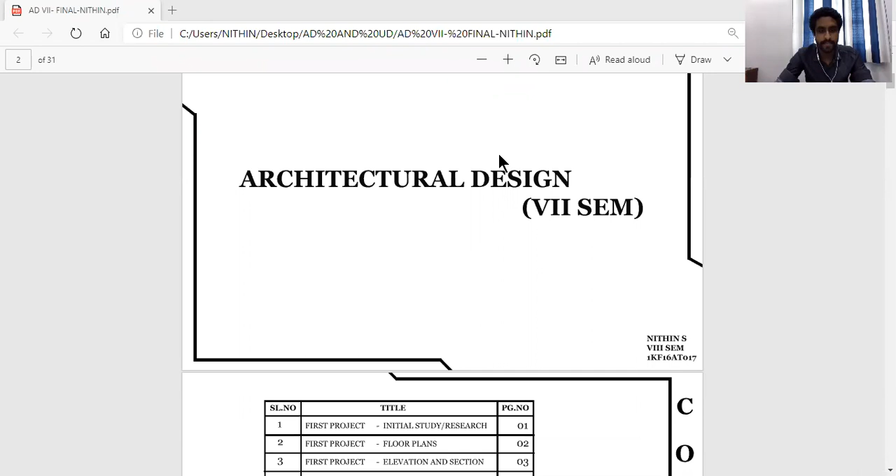So first we'll look into the minor project. The task here was to document an old existing structure and suggest a revitalization of that structure into a space useful for the neighborhood people.

So the structure I chose is in Talagatpura, along the Kanakapura main road. It's a 60-year-old building which was used as a leather making factory in those days, where they used to manufacture leather and supply it to states such as Kerala and Tamil Nadu.

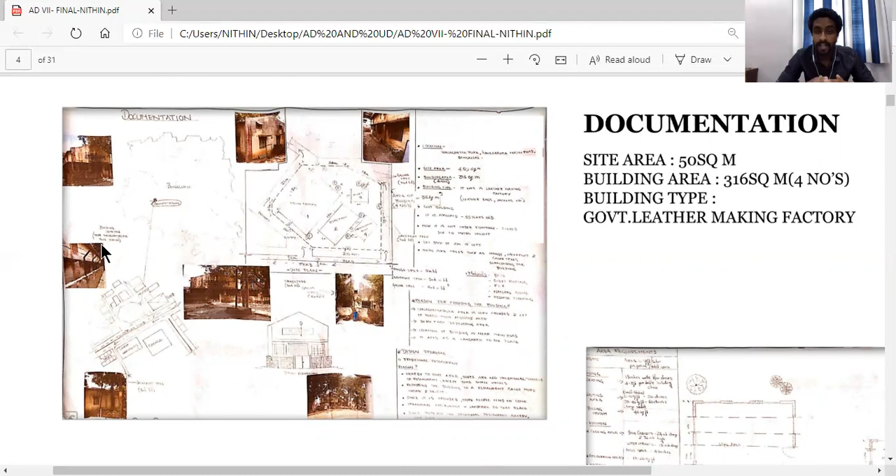What I initially thought was to revitalize that structure into a leather factory outlet itself, so that the old function remains the same and it gives more value to the structure as well as the surrounding space.

This sheet showcases the plans and elevations of the existing structure, where the plan is a simple rectangular plan with a manufacturing unit as well as a small office space. The small rectangular plan towards the right acts as a storage space where they used to manufacture and store leather items.

These two images showcase the elevation.

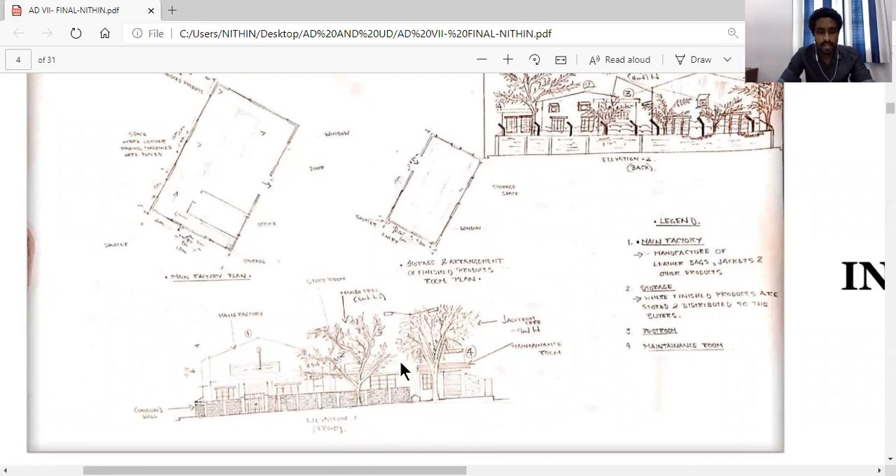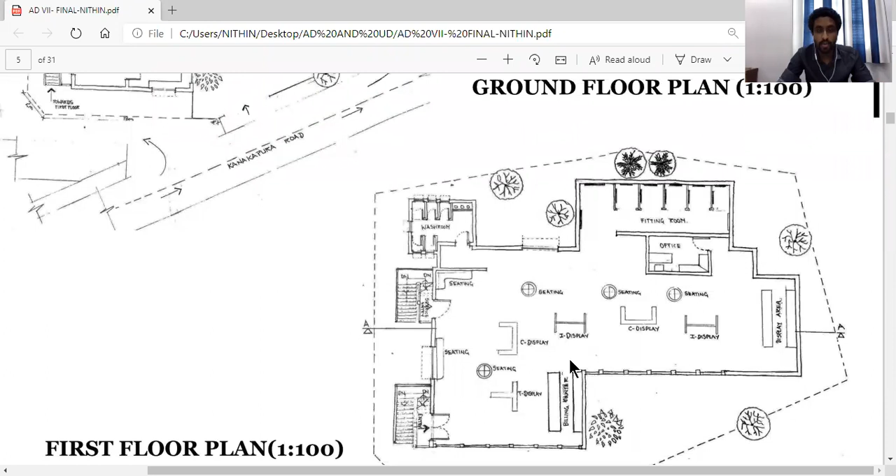Moving on to the proposed plan, it's a G+1 structure. The first plan is a ground floor plan acting as a manufacturing unit for making leather. The second plan acts as an outlet where they used to sell the manufactured leather. So basically it's proposed as a manufacturing unit as well as an outlet in a single building.

So this is about the plan. Moving on to the next sheet, this showcases elevations and sections, with a few details shown here.

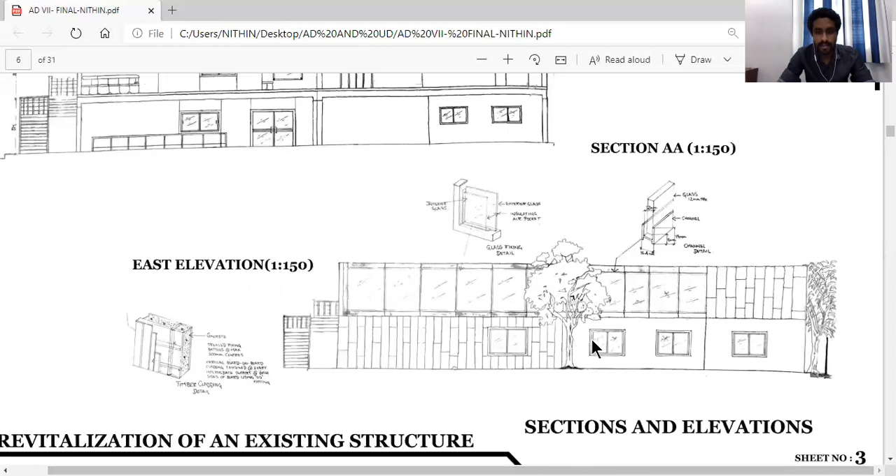These details are of the materials used for the exterior. The ground floor contains timber cladding. Why timber cladding? Because it's versatile, a natural and durable material, environmentally friendly, sustainable, and economical.

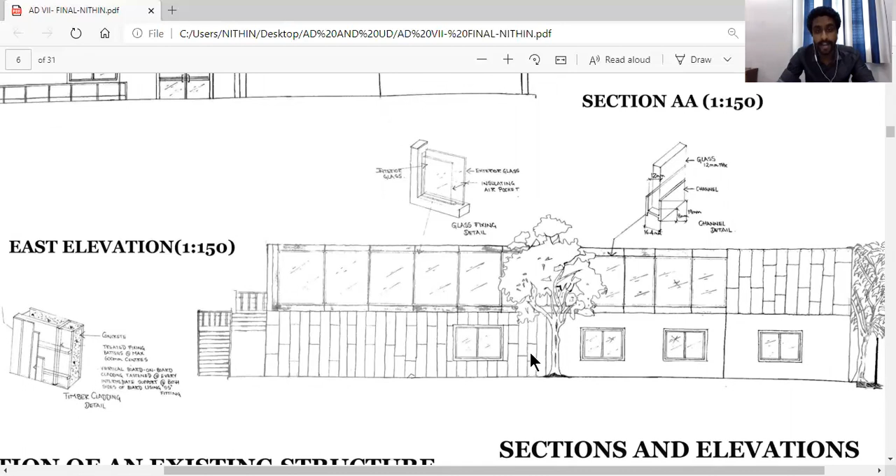The first floor contains a glass panel, and these details here are the fixing details of the glass and the channel detail.

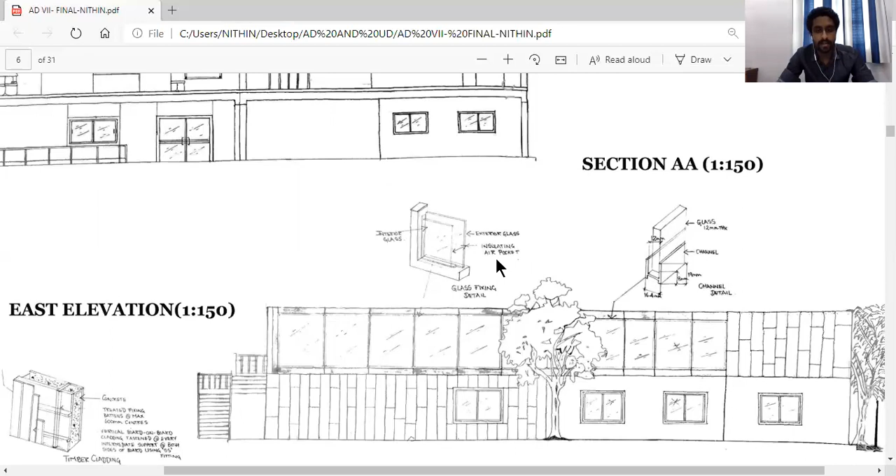So this is about the minor project. Moving on to the major project, which is the court complex.

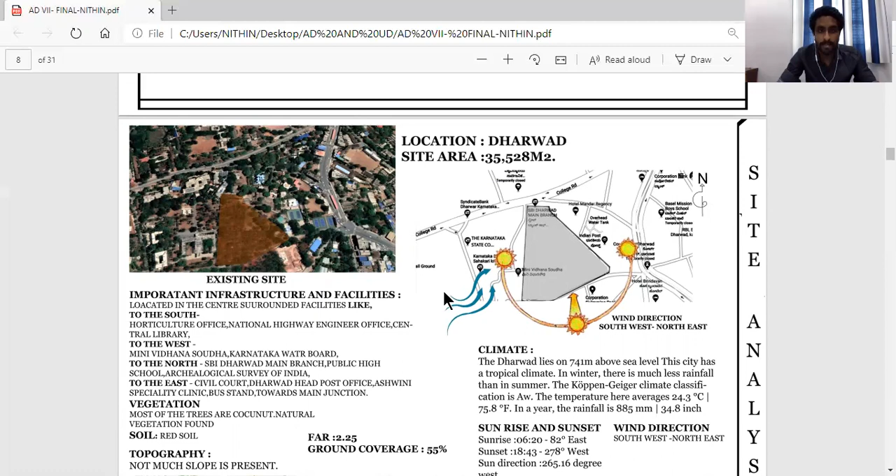Before going into the brief, I'd like to explain about the site. The brown marked portion is the given site, present in Dharwad. The site measures about 35,000 meters square.

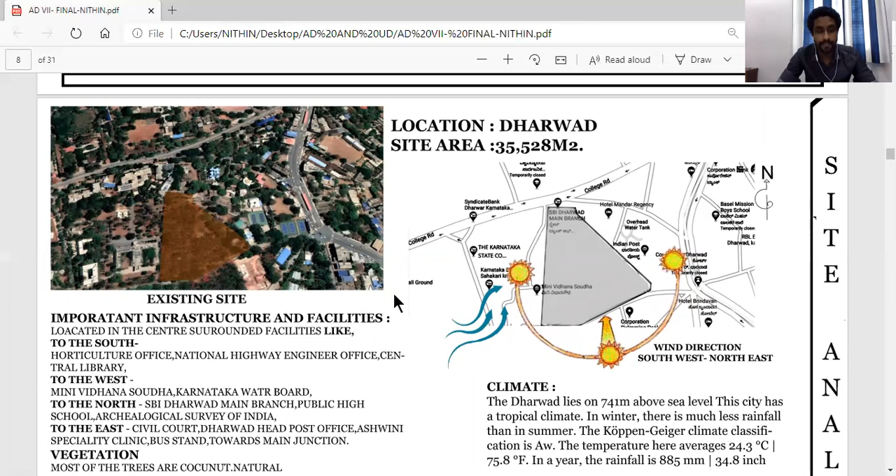There are a few important infrastructure and facilities present around the site, such as the National Highway Engineering Office, Mini Vidhana Soudha, SBI Dharwad, few schools, civil court, etc.

Speaking about the vegetation, mostly natural vegetation is found in and around the site, and the trees commonly found are coconut, mango, and palm. The soil here is red soil.

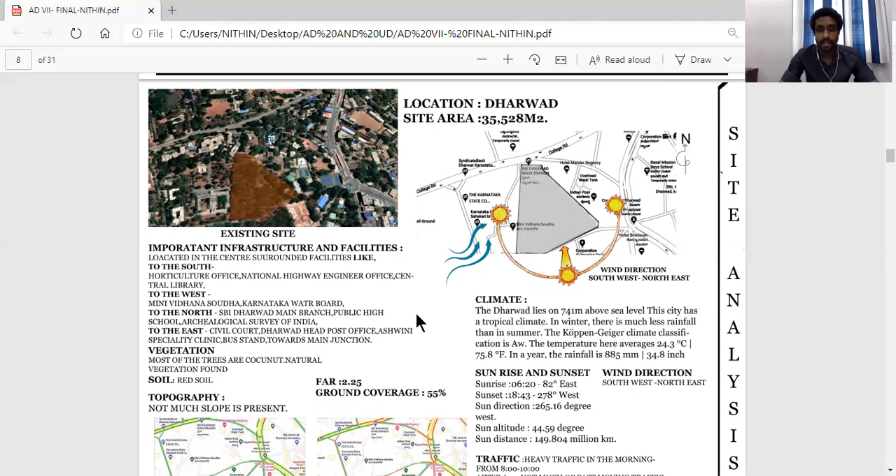The climate of Dharwad is tropical, where the average temperature is about 24.3 degrees Celsius, and the annual rainfall is about 885 millimeters. Sunrise is at 6:20 a.m. and sunset is at 6:43 p.m.

The wind direction is from the southwest towards the northeast. The blue line indicates the wind flow from southwest towards northeast.

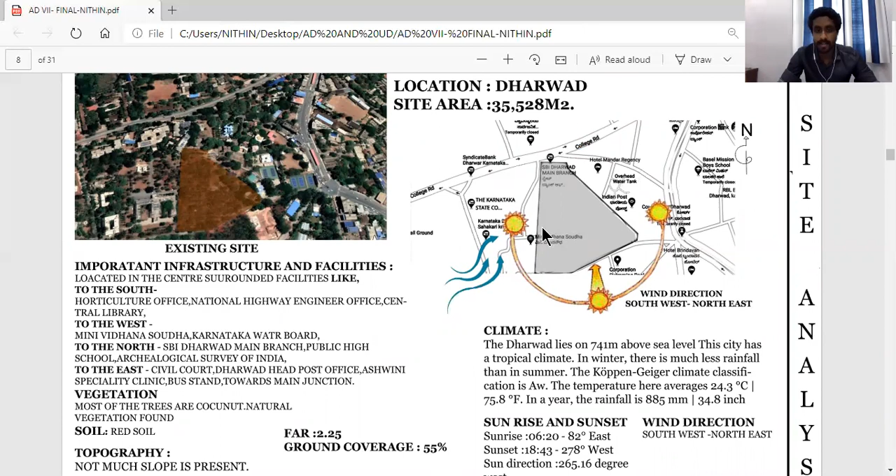About the traffic, heavy traffic is found in the morning from 8 a.m. to 10 a.m. and after 6 p.m.; not much fast moving traffic is found otherwise.

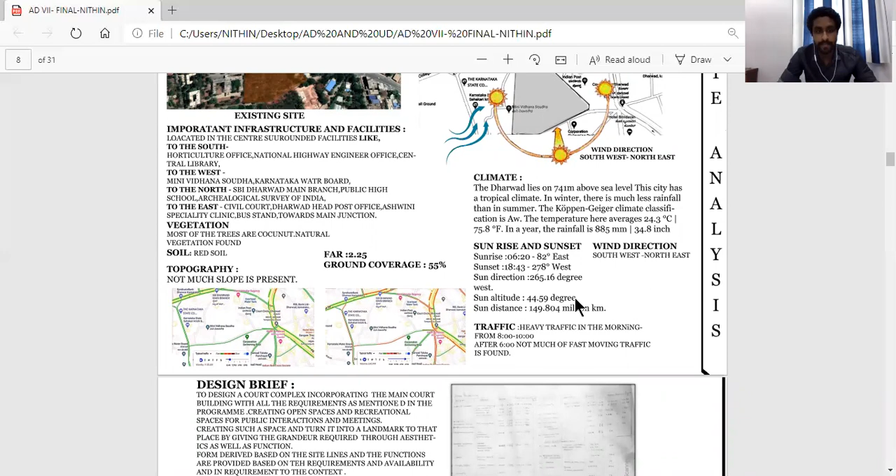Moving on to the design brief, the main idea was to design a court complex incorporating the main court building with all the requirements and availabilities according to the context.

Creating an open space and recreational space for public interactions and meetings was the main aim, turning it into a landmark for that place by giving it the required grandeur through aesthetics as well as function.

So mainly the form was derived based on the site lines, and the functions are provided based on the requirements and availability of the context.

The main aim was to express the idea that the court complex should be a place for meeting, for exchanging ideas, for sharing knowledge, rather than being a place for just discussing case related issues. So to bring in the public to the space, irrespective of them wanting to visit the court complex, was a thought which came into my mind while designing the court complex.

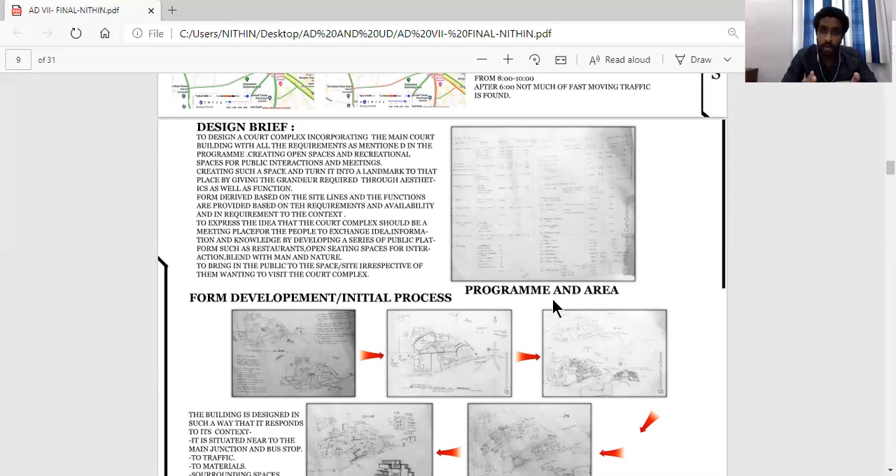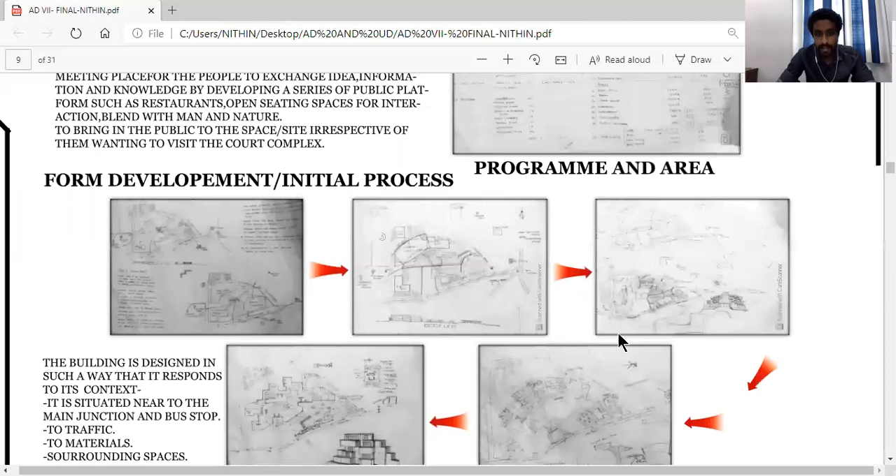These sheets showcase the form development, where initially how the form was, and as it progressed how the form developed, and at last how the result was based on the site lines.

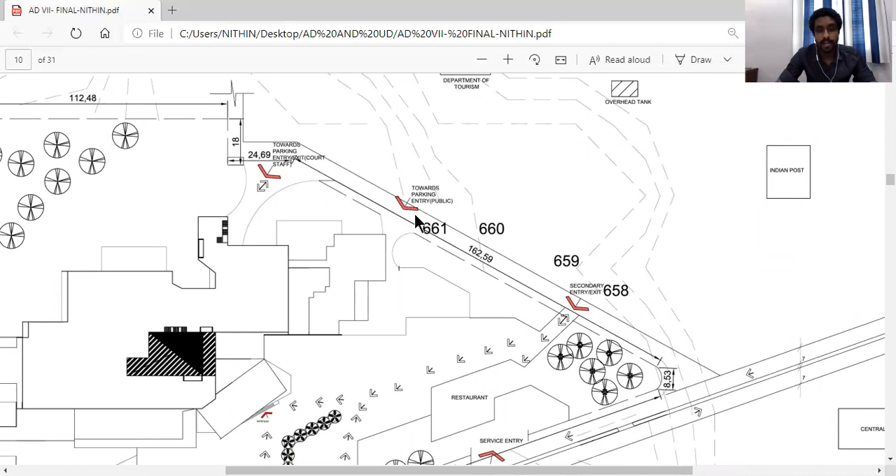Parking has 2 entries. Why is that? It's separated for both public as well as the court staff. This entry acts as an entry for public. This entry acts as an entry for court staff. This building which you can see here is the main court building.

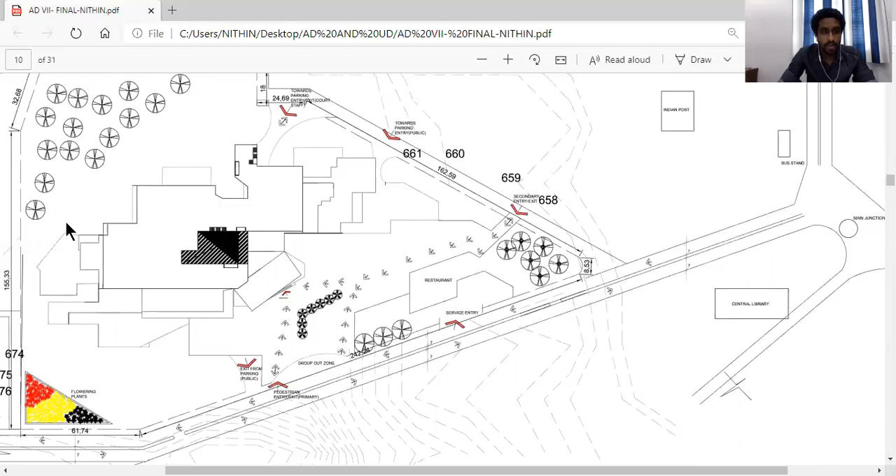Adjacent to it, there is a small restaurant provided with a service entry. The left out space is retained by trees such as coconut and palm, and also a small garden space is provided towards the left bottom corner so that a touch of greenery can be found in the space. So this is about the site plan.

Moving on to the basement plan, it is divided into 2 sectors. The topmost part is a space which acts as parking for court staff, and the bottom space acts as parking for public. As I mentioned, I have provided separate access for both public as well as court staff. This acts as an entry towards the public parking, and this acts as an exit for public parking. And this access which you can see here acts as both entry and exit for court staff.

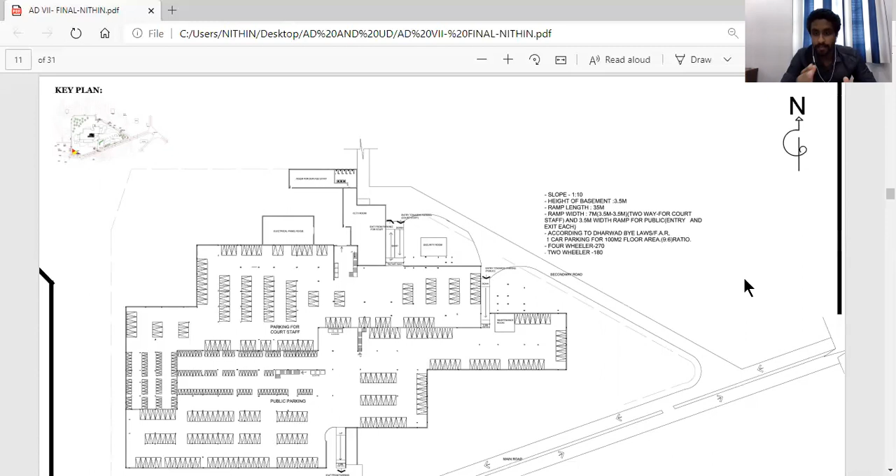Moving on to the technicality, a slope of about 1:10 is provided. Height of the basement is about 3.5 meters. Ramp length is about 35 meters. Ramp width changes for both court staff as well as public, where the court staff has a 2-way ramp which is about 7 meters, and the public has a 1-way ramp which is about 3.5 meters.

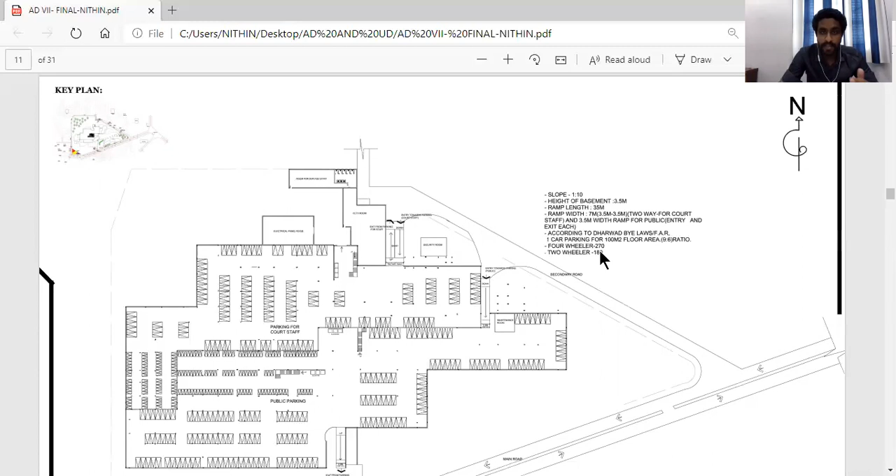The number of two-wheelers are 180, and the 4-wheeler parking spots are 270. These numbers are got from the Dharwad bylaws and FAR. This is the grid layout of the basement.

Moving on to the ground floor plan, this acts as the main entry towards the building, where it's raised about 0.6 level. As soon as you enter, you can find 3 axes, where if you go towards the left of the building, you can see spaces which are related to public, such as registrar, accounts, stamp vendors, stationaries, public relation office, etc. And a small waiting area is also provided.

And the central space is provided with a large courtyard, where the interiors of the building do not face any problems related to light and ventilation.

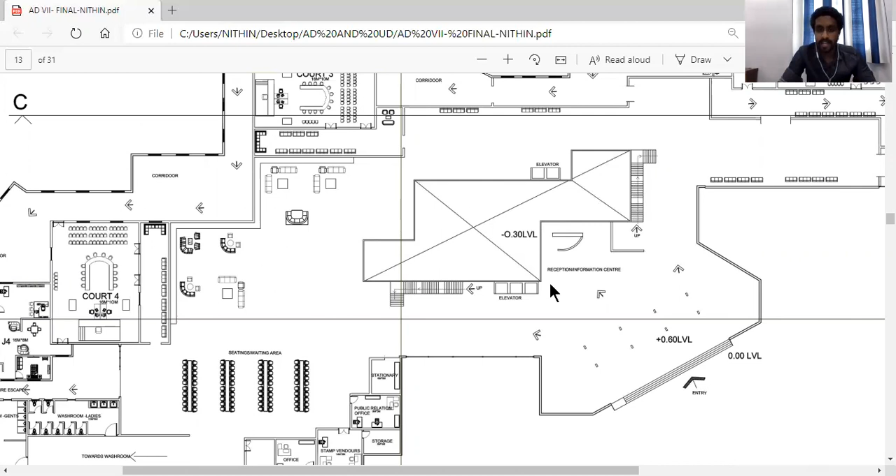And the other part of the plan consists of the courtrooms as well as the adjacent judges' rooms. There has been a separate corridor provided for the judges and the lawyers so that privacy gets created between the court staff as well as the public.

So mainly there are 12 courtrooms provided, among which 4 are present on the ground floor. These are the courtrooms, and adjacent to them are the spaces for judges and the lawyers.

And also, as I mentioned, to avoid the problems dealing with light and ventilation, the wall system of the building has been provided with glass panels, such as which you can see here. The glass panels are provided so that there is no problem dealing with light and ventilation, and also at regular intervals, windows have also been provided to avoid problems dealing with light and ventilation.

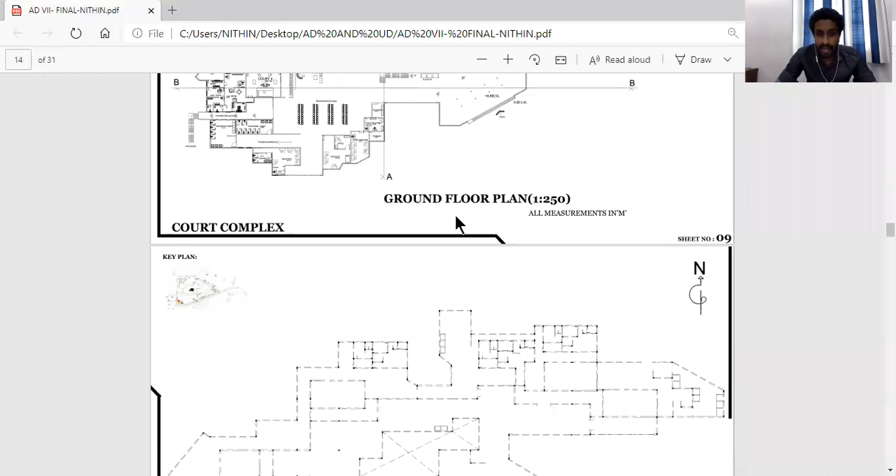So after each and every plan, grid layout as well as column layout has been shown.

Moving on to the first floor plan. It follows the same pattern as the ground floor plan. In addition, functions such as a cyber room and a waiting area attached to it are provided so that it can be used by both the public as well as the court staff.

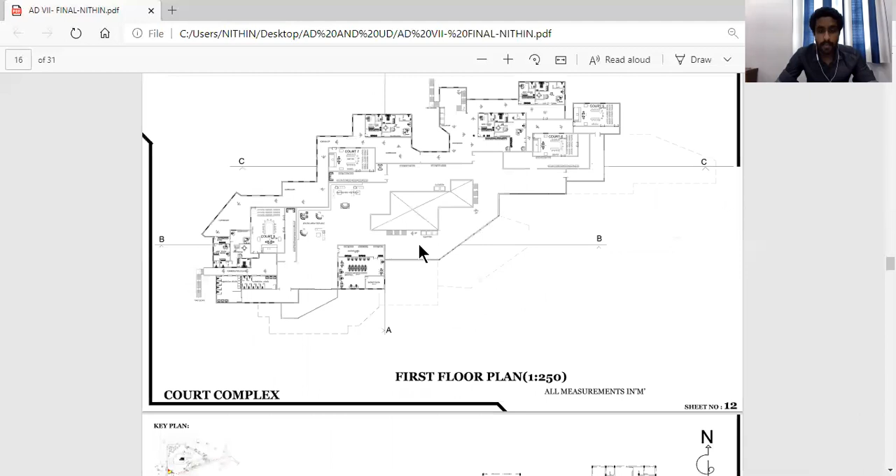Moving on to the second floor plan, here as well the same pattern follows. In addition, functions such as a cyber room, a waiting room adjacent to it, a small record room where they can store records, documents, case-related documents and few stationaries, and a large record room for keeping the main case documents as well as other related files.

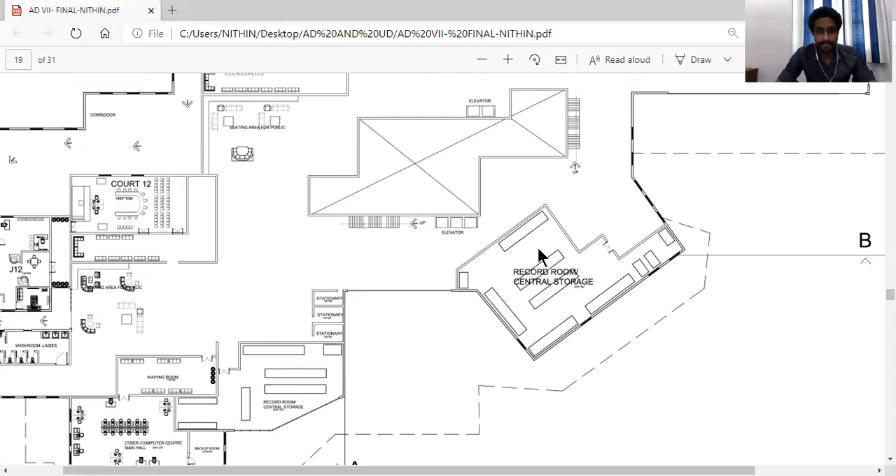As you can see, the form keeps changing on each and every floor. This is due to the fact that it shows the massing on each floor and the irregularity, which adds to the aesthetic as well as the uniqueness of the structure, and also based on the space and availability on each floor.

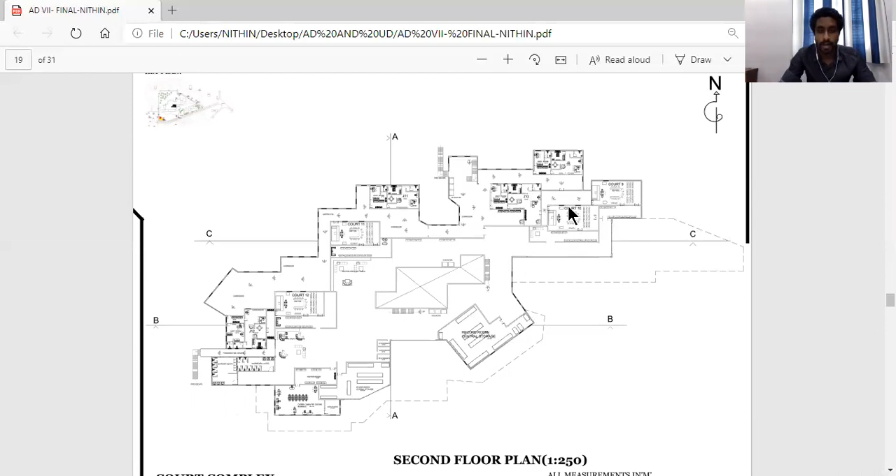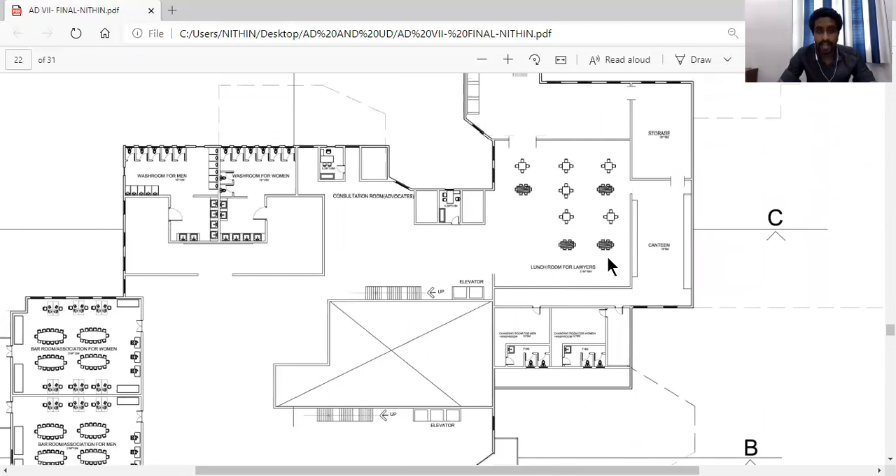Moving on to the third floor plan, here it's completely spaced for the court staff, where functions such as few consultation rooms, a space for bar association provided separately for women and men with a common balcony, washrooms, and also a canteen along with the lunchroom are provided for the court staff.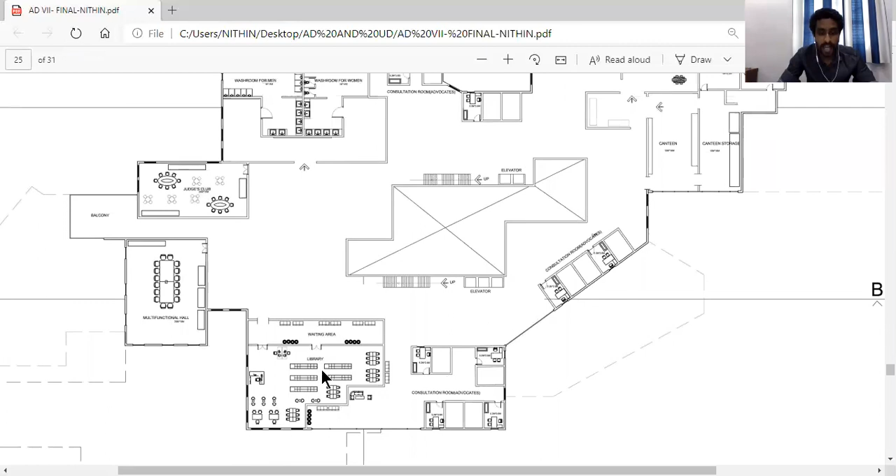Moving on to the final floor, the fourth floor, here it houses functions such as a multi-function hall where they can have discussions or meetings related to cases or other issues, a separate judges club, washrooms, and few consultation rooms. Along with that, a library which can be used by the court staff. Towards the right, you can see a canteen adjacent to a lunch area which can be used by the lawyers and the judges.

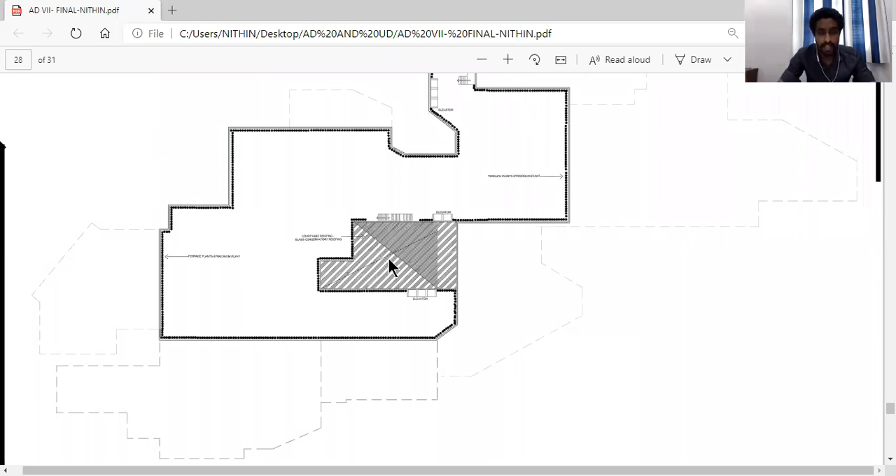Moving on to the roof plan. This is the courtyard area, which is covered using glass. The glass used here is glass conservatory roofing. It is energy efficient, helps retain heat, and keeps the interiors warm during winter. Even though it's expensive, it has high compressive strength compared to other glass materials.

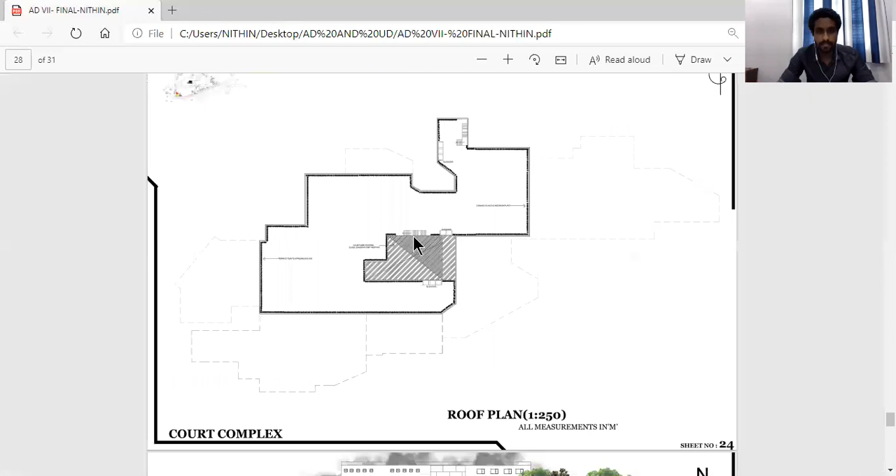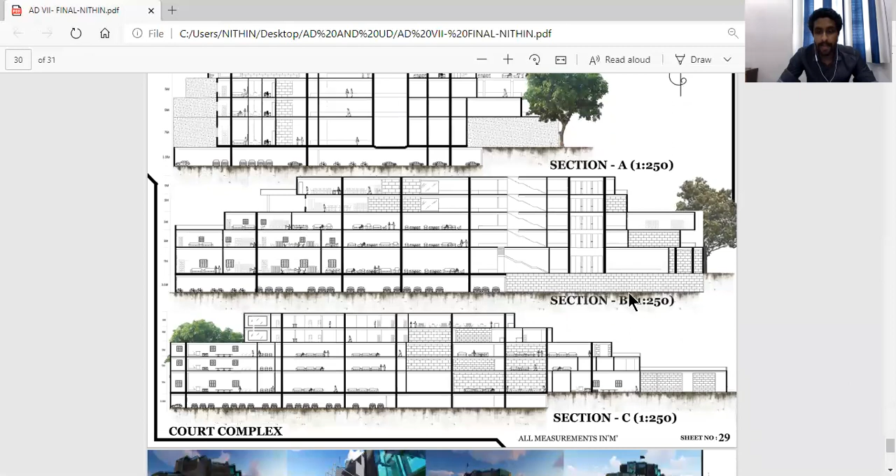This sheet showcases the sections. Section A is cut vertically to the plan, through the courtyard — this being the courtyard. Section B is cut horizontally, through the staircase — this being the staircase. Section C is cut in such a way that it showcases the washroom. So mainly there are three sections cut: Section A is cut vertically to the plan, while Sections B and C are cut horizontally to the plan.

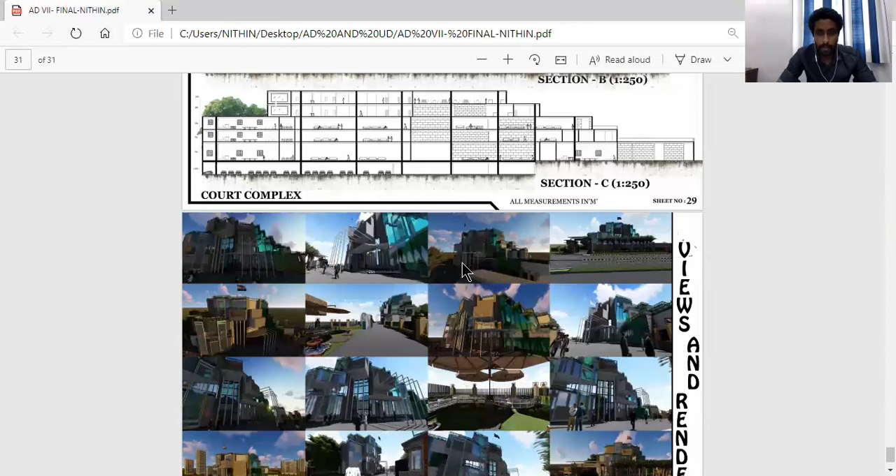Moving on to the final sheet, which is the views and renderings. As I had mentioned earlier, I have provided a few recreational and open spaces, which you can see here, provided next to the restaurant area as shown in the site plan. These spaces can be used as a place where people can come and share their knowledge and views, rather than coming to the court place to discuss case-related issues.

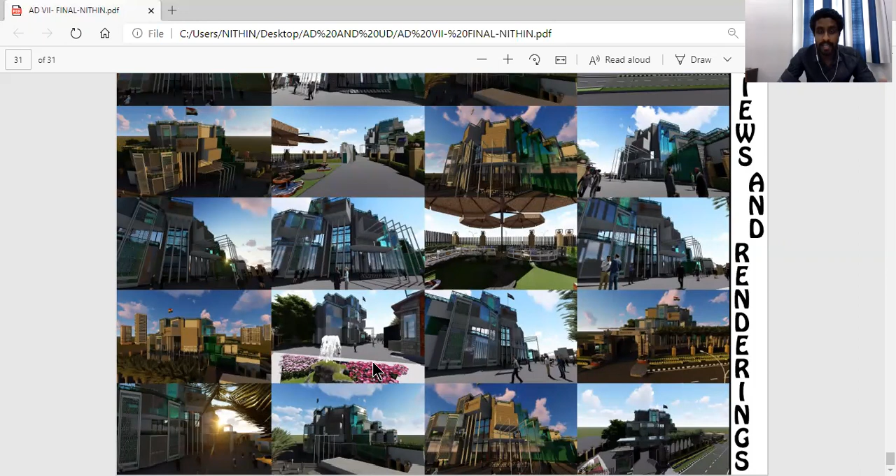Also, as I mentioned earlier, the leftover space has been provided with greenery. As you can see, there is a garden with a fountain provided, so that a touch of greenery can be found on the site. These views show the main court building taken at different angles.

The material used is fly ash blocks. The reason is that fly ash blocks have high compressive strength, lower water absorption, high strength-to-weight ratio, and they form a uniform spacing between each other. Glass panels have also been provided, which are openable, as I mentioned earlier, and louvers have been provided so that not much sun enters into the building.

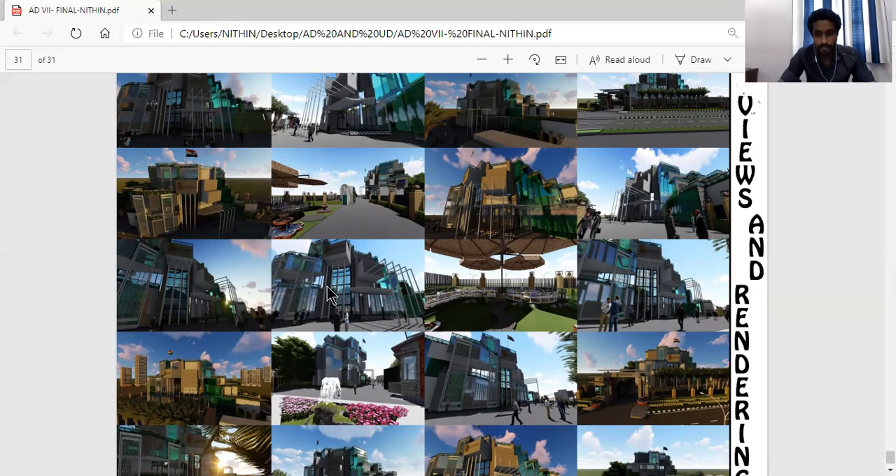So this is about the projects which I have done in AD VII, both minor and major. Yeah, that's it. Thank you.